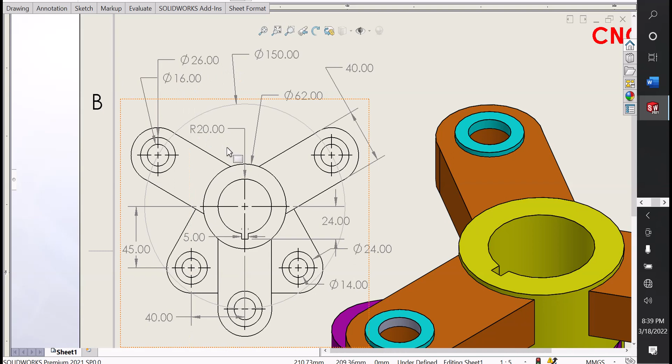Width 40 millimeters, and the flange has two circles, outer circle 26 millimeters, inner one 16 millimeters. We need three patterns, and 120 degrees from one flange to another flange angle.

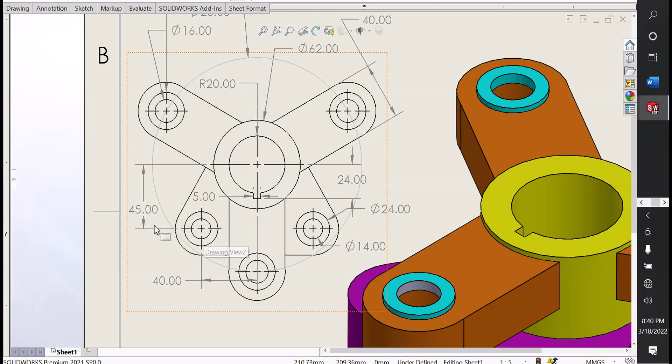Here are two circles, outer diameter 24, inner one 14 millimeters, and the center distance between origin to circle center is 45 millimeters. Let's try to make this.

First take part interface, then I will choose front plane. I choose top plane in this case. Our top plane is ready.

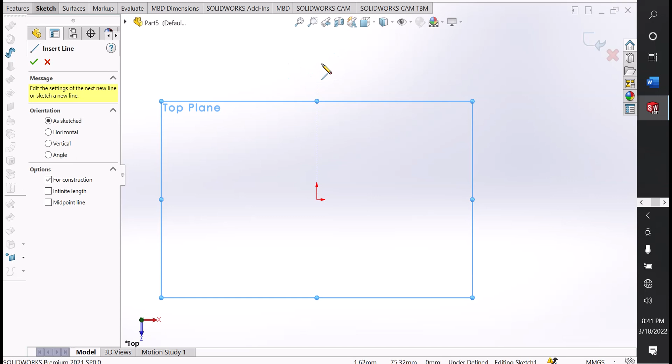Now I select center line. Now circle, I choose three circles.

One, two, and the last bigger circle. The last one is construction geometry.

Now it's construction. Let's define smart dimension. Here is the bigger circle diameter 150 millimeters. And here 62 millimeters.

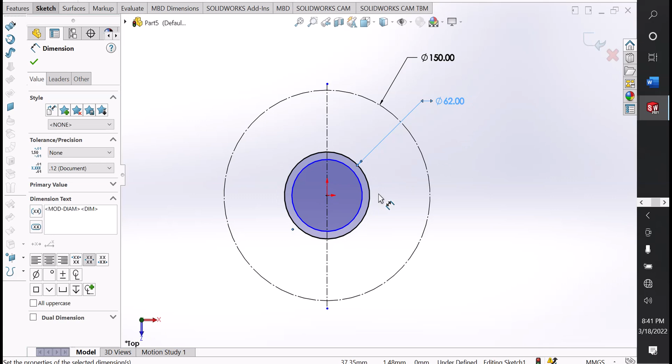And the shape, small circle 40 millimeters.

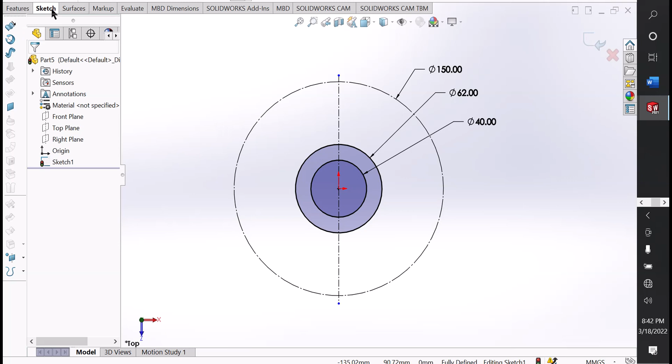Now I choose slot. If you want, you can choose many different types for your practice, like line, rectangle, slot, everything. I just choose slot, straight slot.

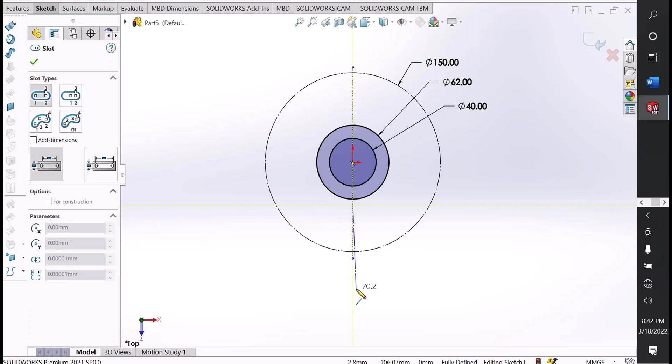Start from here. No need to define first. See, slot width 40 millimeters.

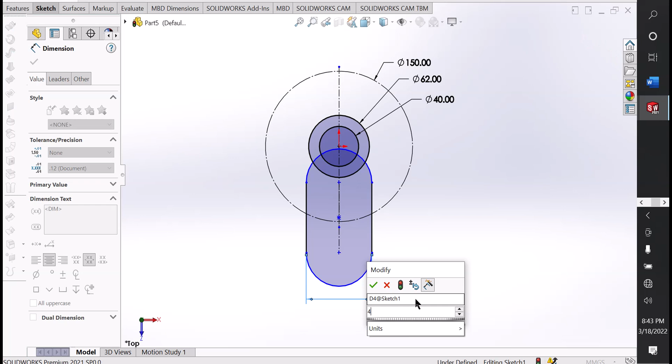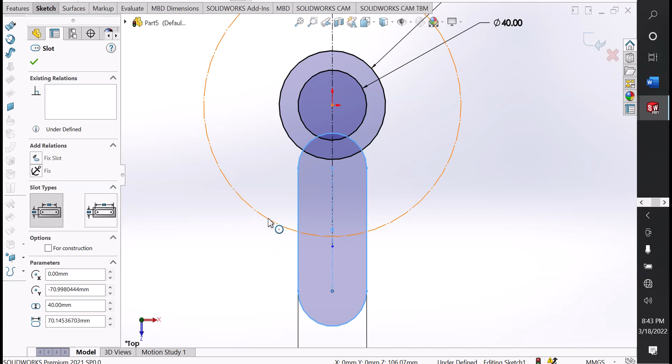40. Click the slot point and hold control key, click the circle, make sure it's coincident. Now it's coincident.

Let's make it bigger. Now I cut this inner portion using trim, power trim.

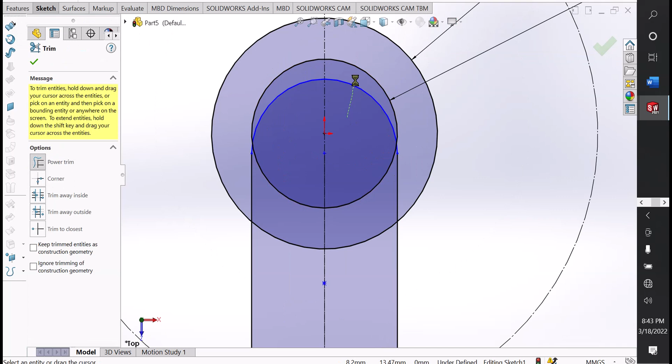Now click this point to this point, make sure it's horizontal, and click this point to another point, hold control key on this center line, make sure it's symmetric.

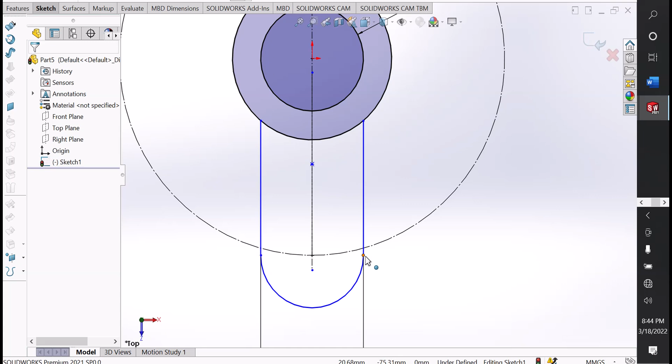This point, control this line, make sure this point, control this point, make sure it's horizontal. So now our design is fully defined.

Let's do circle, I need two circles, starting from the center, 1 and 2. Let's define.

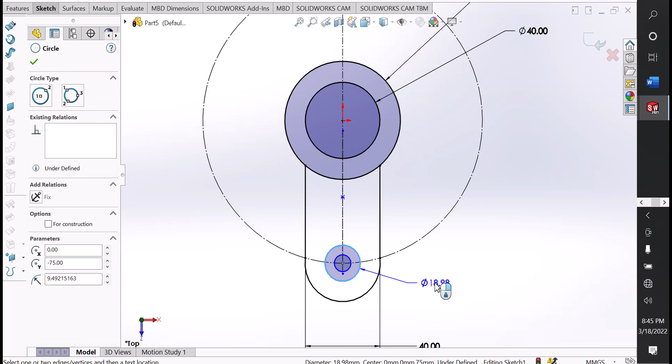Here outer diameter 26 millimeters, and then inner one 16 millimeters.

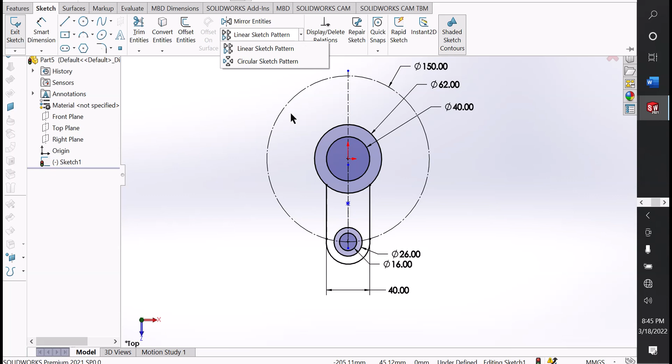Now this shape needs a pattern, three pattern. I click circle sketch, and here linear sketch pattern - but since ours is circle, I choose circular sketch pattern.

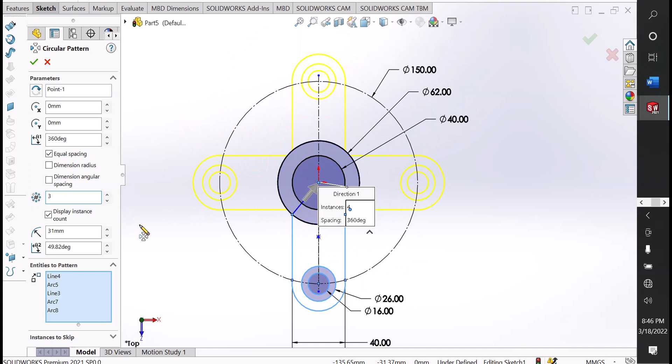And choose all these entities: 1, 2, 3, 4, 5. Here showing 4 entities because I need 3. Click this interface, now showing 3 patterns.

Click this point, now hold control key on this origin point, make sure it is coincident. Our design is fully defined.

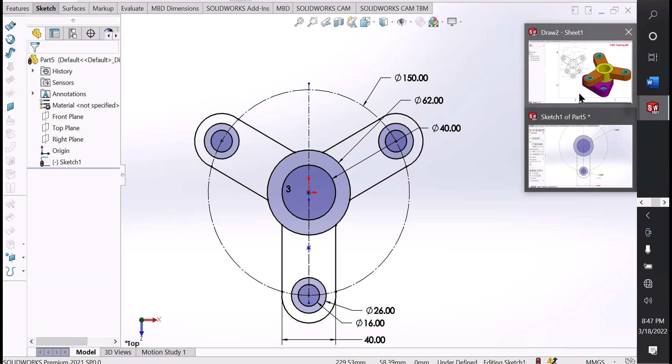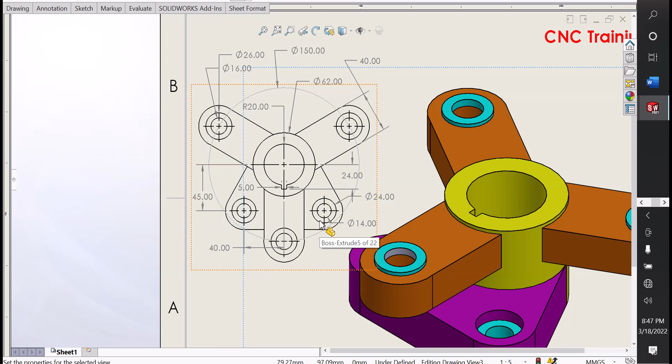Now I choose this. Here is the bottom base, distance 40 to 40, 80 millimeters, and origin to circle center distance 45 millimeters. Let's make it.

First I choose line, start to here, click this line and go forward. Let's go backward to this point, it's automatically an arc. Click this point and this point.

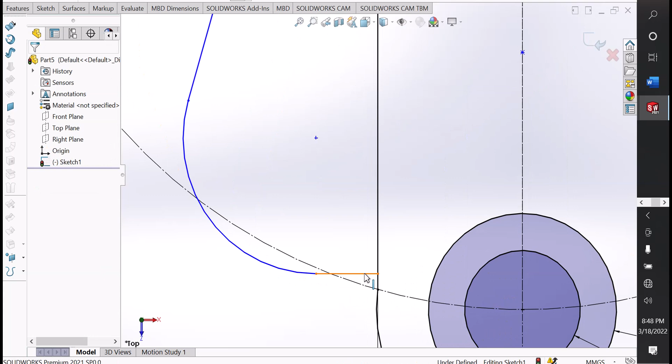If you want you can make it tangent option. First click this point, make sure it's tangent, and it's also tangent, and then make sure this line is horizontal. Now it's horizontal.

Now choose this line and hold control key on this circle, make sure it's tangent. Now it's tangent. Now I cut this unexpected line - choose trim entities, power trim, and drag this, it's cut.

Let's define. First distance, origin to this point. Here is 45 millimeters.

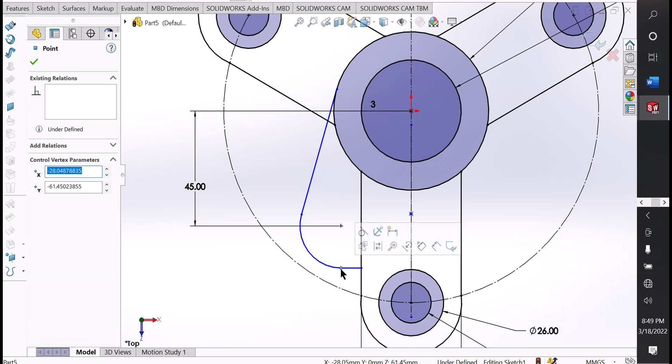Now end of arc, control circle, make sure it's coincident. So now it's coincident. And then horizontal distance.

Click origin point and this point, and horizontal distance 40 millimeters.

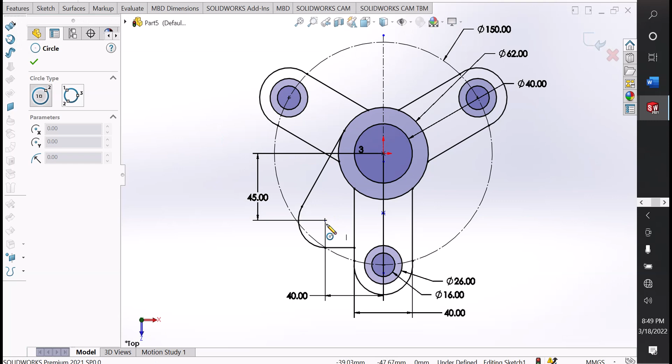Now I choose circle, here are two circles. Let's define.

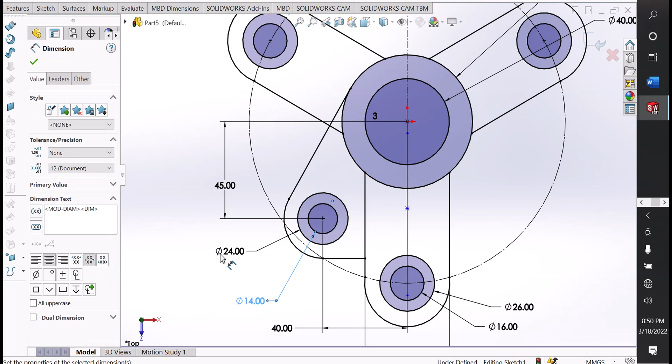Here outer diameter 24 millimeters, inner one 14 millimeters.

This shape needs to be mirrored from another one. Just click sketch, here is mirror entities, and choose 1, 2, 3, 4, 5. Mirror about, mirror from center line.

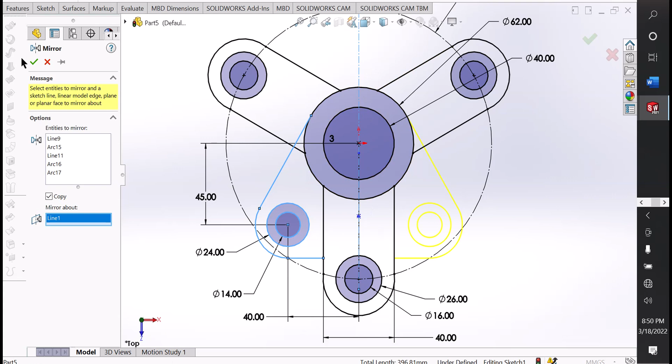Now I cut this portion because it is an unexpected line. First trim entities and drag it.

Select this point and this point, make sure it's horizontal. Now our design is completely ready.

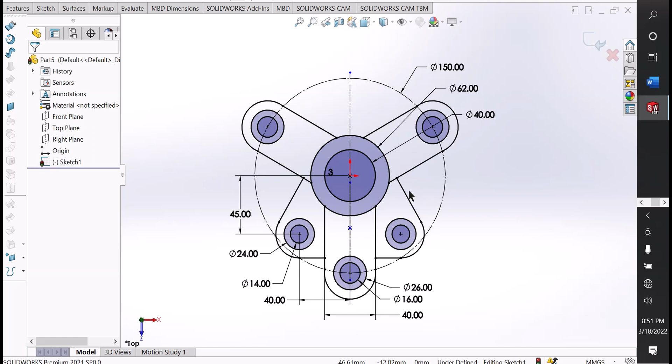If you want, you can make this 3D, but don't need it now. I will learn step by step. You can make it carefully.

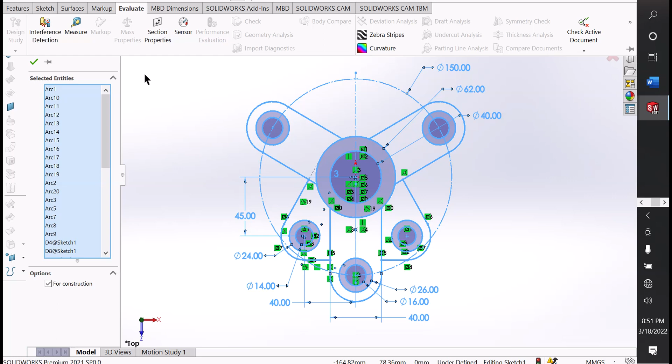All dimensions are selected. Here is the option evaluate, here is measure.